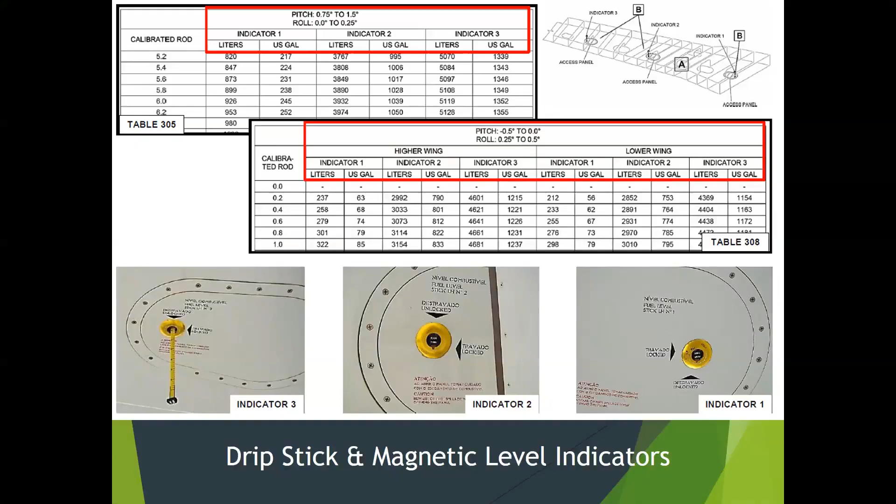Next section we're going to look at is starting to get into the actual fuel feed, getting fuel to our various users. What do we use fuel for on a transport aircraft? The engine's the big one. There's usually one other item: the APU. Engines or APU pretty much are the only fuel users. We have plenty of hot air from the engine, so we don't need a fuel-fired heater or anything like that.

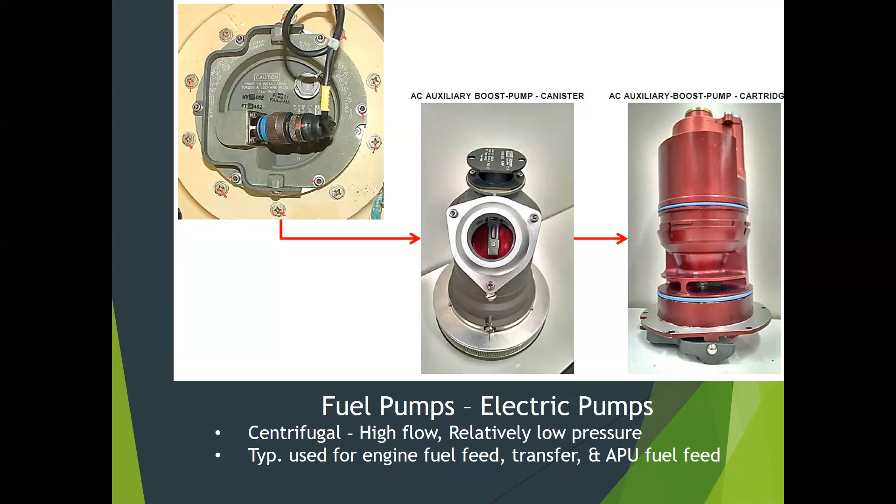When you get to your engine, there's going to be a high pressure pump on the engine itself. But in the tank, these boost pumps are just trying to move the fuel to the engine, move the fuel to another tank. If they're a scavenge type pump, move the fuel to the defuel system, or to the dump system, if that's the case. They can be installed in any of these areas — used for engine feed, transfer, APU fuel feed. They can also be used for dump systems and defueling.

Now, the other main type of pump we're going to see is an ejector pump, or a motive flow or venturi pump. This one doesn't have any moving parts inside of it, but it does rely on having a fuel flow source, a fuel pressure flow source, from somewhere else. These are often used for scavenge as well as engine fuel feed. You can see they've got kind of this little trumpet-looking design going on. Here's a pump, and here's the diagram of what's going on inside it, right below it.

So what's happening is we take a high pressure motive source and shoot a little jet through a venturi, and that's going to create a vacuum, a low pressure right here, that pulls a higher volume of fluid. So you take a high pressure, low volume jet of fuel, and use it to pump a high volume, low pressure flow of fuel.

One way is for scavenge, where if there's a low point in a center tank and you need to move that fuel to a wing tank, or a low point in the wing tank to get it into the collector tank, it can do that. They're often used out in the surge tanks, out in the wingtip, if fuel gets into that surge tank, to get it back into the wing tanks themselves. So there's usually a scavenge pump at the bottom of your surge tanks out in the wingtips, if they have them.

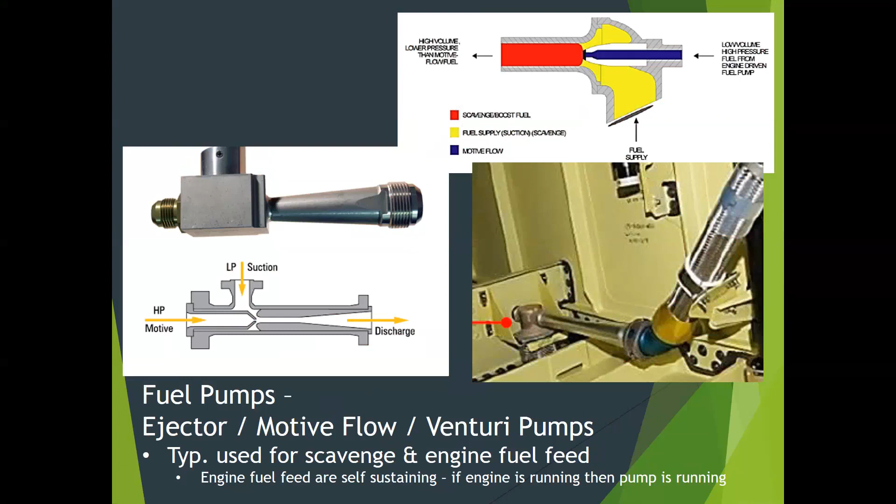So these pumps don't care if you have power - they feed into the fuel distribution system. I mentioned earlier that two common designs are a 3-tank and a 2-tank configuration. We're going to look quickly at each. Here's a 3-tank, a detailed schematic.

These are scavenge ejectors right here, in the wings. Here are the collector tanks, and here's the center tank - the collector tanks for the wings are actually inside of that. Fuel goes from those collector tanks down to the engine right here. This is a very simple version of it - engine fuel feed, collector tank feeds the engine. You can see the engine has fuel going back to the motive flow pump, and then there's a standby pump. Looks a lot like what I just drew.

They're all illustrated here. Here is the main ejector pump that can feed the engine. Here's a left boost pump that can feed the engine. By the way, this is the type of aircraft they left the engines running on - this is the fuel diagram from it. This ejector, the scavenge ejector, is also powered - this blue line going back is the high pressure fuel from the engine, a little bit taken back for motive flow, gets sent back. It powers a scavenge ejector, which helps move fuel from the wing to the collector tank. Gravity can also do that through this yellow line. Then some of the motive flow comes up to the main fuel pump, the main ejector, to send fuel to the engine.

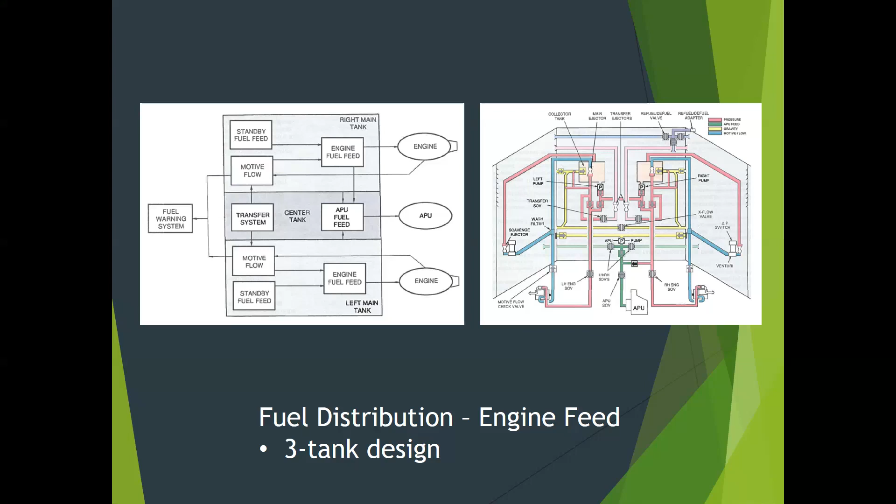Little bigger diagrams of each of those - I guess this one would have been better to show.

Differential pressure switches are there to make sure pumps are working - they tell you if the pump's working or not.

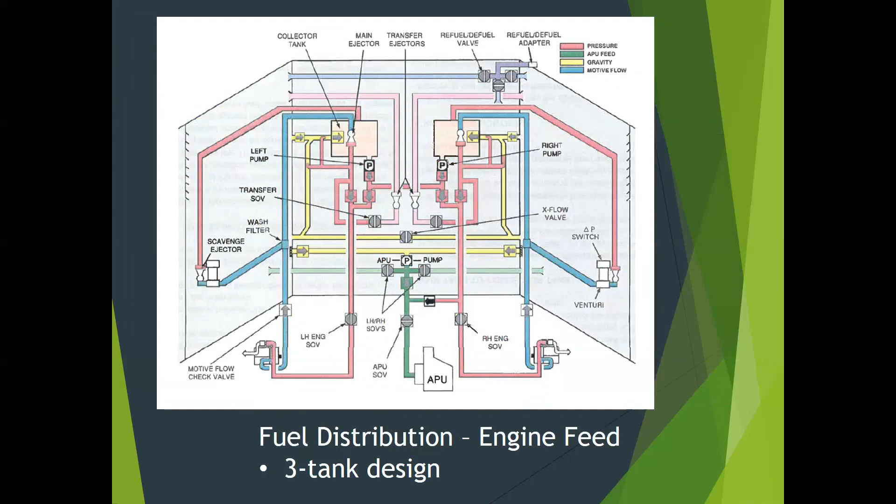In a two pump or two tank engine or aircraft, you have this - the center tank's eliminated, but the feed to the engines actually looks almost identical. So here's our engines - fuel has to be fed to them. Fuel gets fed from, here's an AC motor pump. Here's your dividing line. Fuel from the left wing can come all the way down - this is essentially your collector tank right here. You see there's check valves - all these little red things are check valves. They allow fuel to go into this tank, but not out.

The AC motor pump can send fuel down to the engine, or the Venturi style pump can send fuel out to the engine. That Venturi pump is powered by the engine sending motive flow. In this case, there are a couple of scavenge pumps throughout the wing - one in this outer bay that can send fuel to the collector tank, one in the inner bay, also getting motive flow fuel from the engine. Then you have the actual Venturi main on the inboard bay, and the main Venturi motive flow pump feeding the engines from the collector tank.

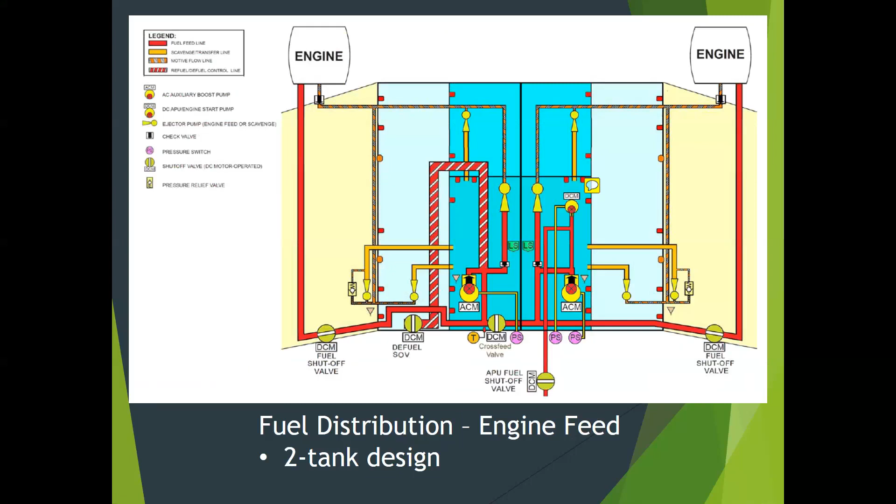Here's a block diagram version of it, maybe a little simpler. The main Venturi pump and AC motor pump can both feed the engines. You also can open a cross feed to send fuel to either side, to both sides, from one wing. The APU can also run off of - you can see on the right side there's a DC motor pump that can feed in as well. That would be on to send fuel down to the APU during APU start from the right section of the manifold.

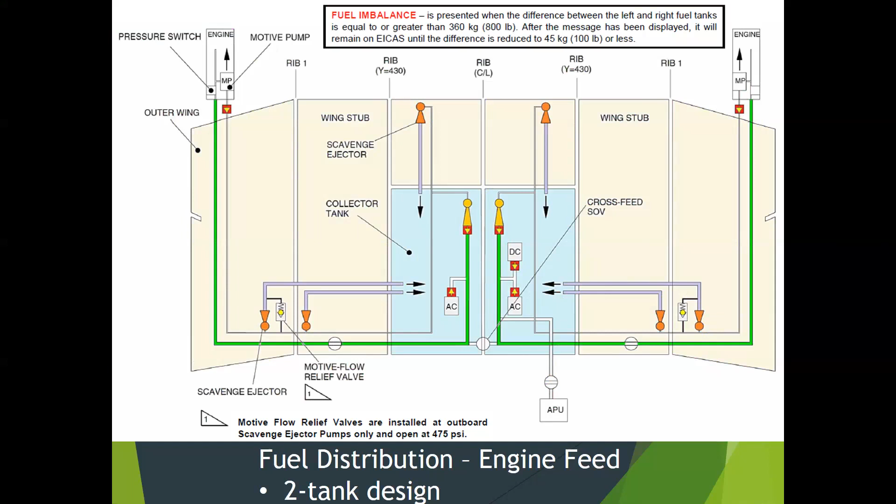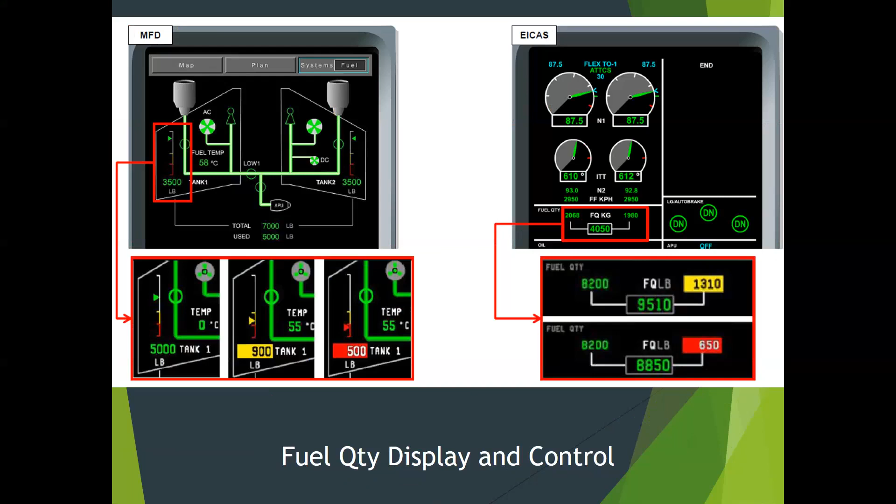Okay, so you look at the details. This whole system's controlled by a panel that looks like this. Here's that left AC pump. Here's that right AC pump. Here's that APU pump, the DC pump. We can open and close our crossfeed.

Or the Venturi pumps. Engine feed Venturi pump and scavenge Venturi pumps. Where are they? How do we turn them on and off? You turn the engine on and off, right? There's no control for them.

So normally on this modern aircraft, these are kept in auto. If the Venturi pump is making pressure, these AC pumps will shut off. If the Venturi pump is not making pressure, the AC pumps will turn on. If you want to force them to turn on, you flip it to the on position. For the APU, you reach up and put it into start, and it automatically turns on that DC pump. You can turn it on manually if you need to.

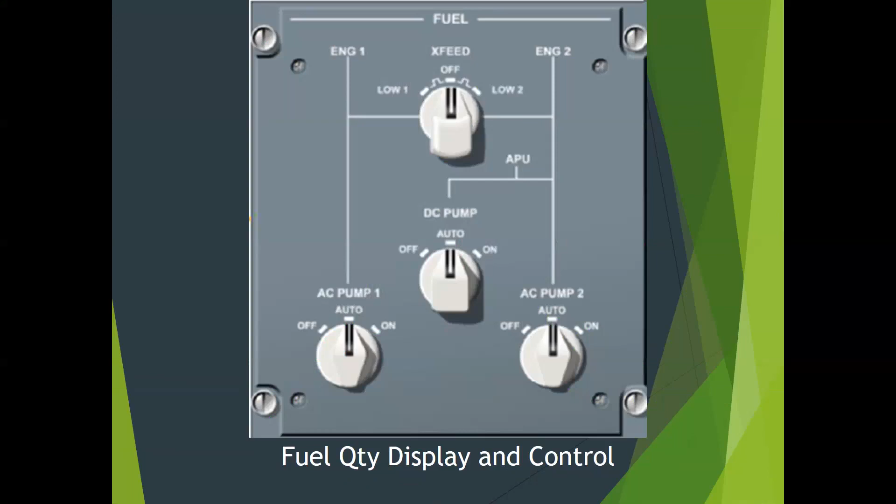Crossfeed, it's off. It's basically a check valve you can control. So say you have low fuel on the left, you turn it to the left low, and that's going to pull fuel from the right and send it to the left engine. Put them next to each other: there's that crossfeed valve with some check valve componentry to it, there's that left AC motor pump and our right AC motor pump and our DC pump. But again, no controls for the Venturi pumps.

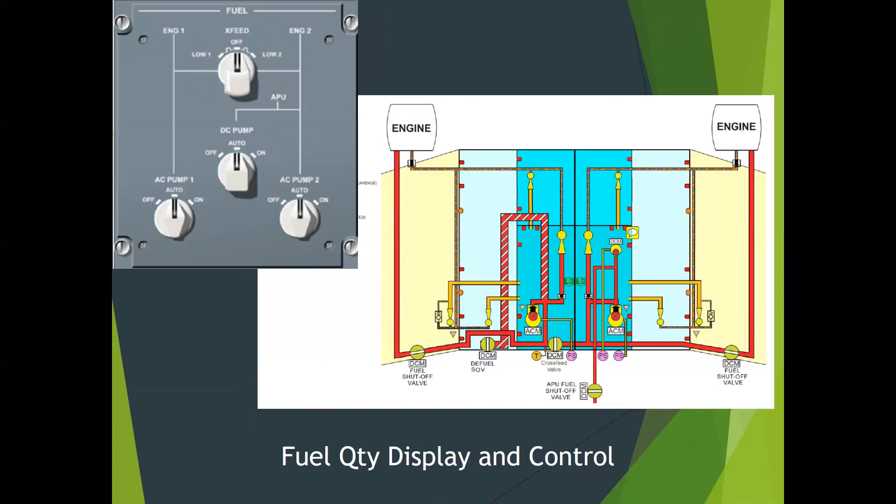So let's see, I do have a video. If you have some time, I suggest taking a minute to watch it. I'm not going to show it right now, just in the interest of getting our stuff done. But it shows the A320, and they walk through how the fuel system works on that, which is very similar to the couple aircraft that I showed up here. The two aircraft: the 3-tank aircraft was a CRJ, and the 2-tank aircraft was an Embraer 175.